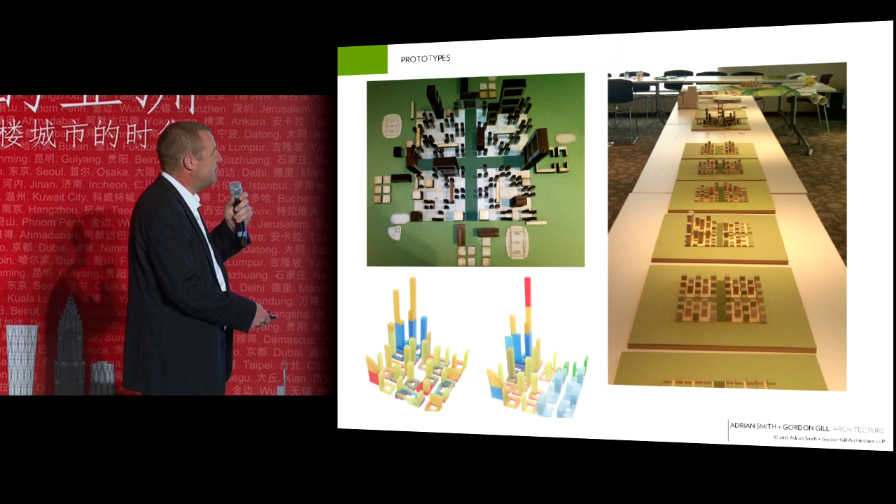This was actually a meeting in the client's office where we were walking him through the process of how you might start to develop a city around that. This shows you an example of how we like to work with the client—working with them to put ideas together, connect stuff, and so on.

During this meeting on the second day, the client actually said, well, that's very nice, but we have a site now, and I'm afraid a square thing isn't going to work. You're going to have to think of something else. And this was the site he gave us here, and this is the site in Shuangliu County.

This is a freight rail, this is a main road, and our site is this. So one of the things we wanted to do was firstly look at the topography, and what was really great is that we were able to do this in front of the client using GIS. He provided us with some survey data and a satellite image, which is all we needed. We took this, did a digital elevation model, and right away you can see we have some beautiful topography. We have a ridge running east-west—this map is oriented north-south—and a ridge running north-south. So we had natural valleys, which we thought straight away we could use for managing rainwater.

From that, we were able to develop this. We took the site and made it a little simpler to visualize by drawing along a series of contour lines. Then, through simple mathematics, we were able to develop a circular form of 1 square kilometer.

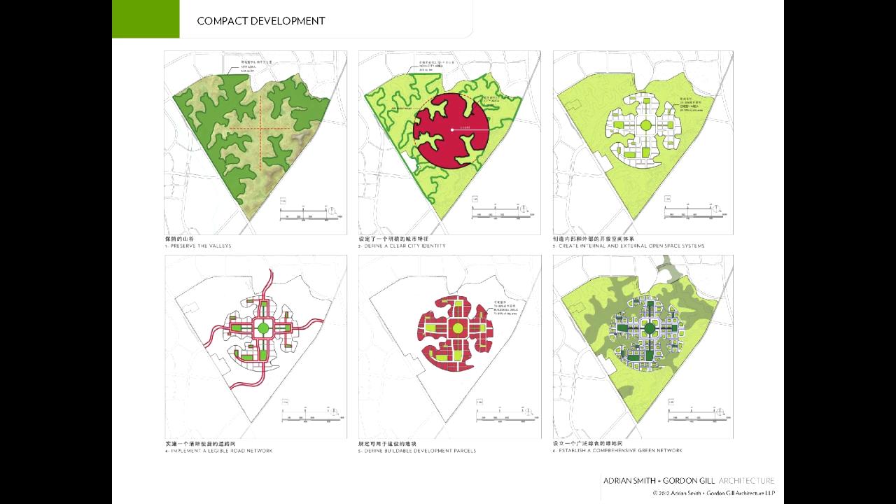We've already heard from the previous presenter how we have experience rationalizing street layouts and parcelization to make it walkable, make it accessible, and give it a clear center of focus. But all of these parcels are also things a developer would be interested in developing, since they're a manageable size. This is the road layout, and this was basically how we developed the mixed use theme.

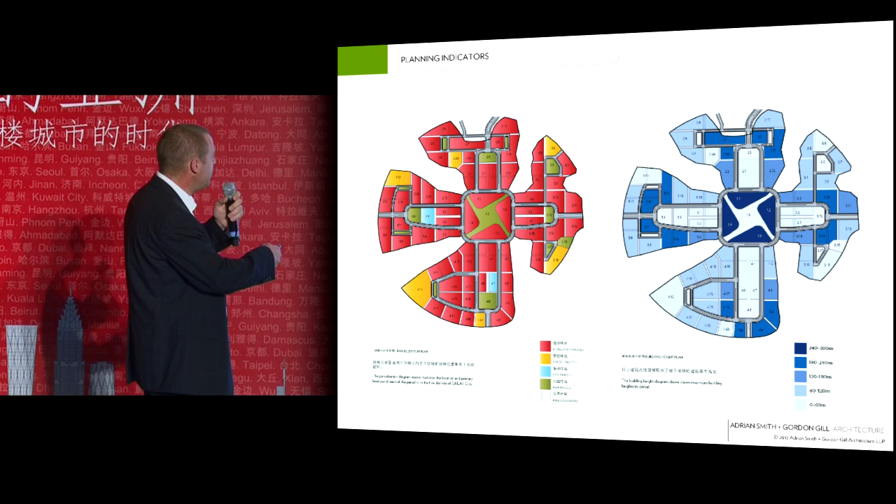We knew the city needed to have a clear center, a district center, a center of focus where you'd have taller buildings. But at the same time, we didn't want simply a central business district in the middle with residential outside—that was not what we wanted. So we had district centers in each of these four districts.

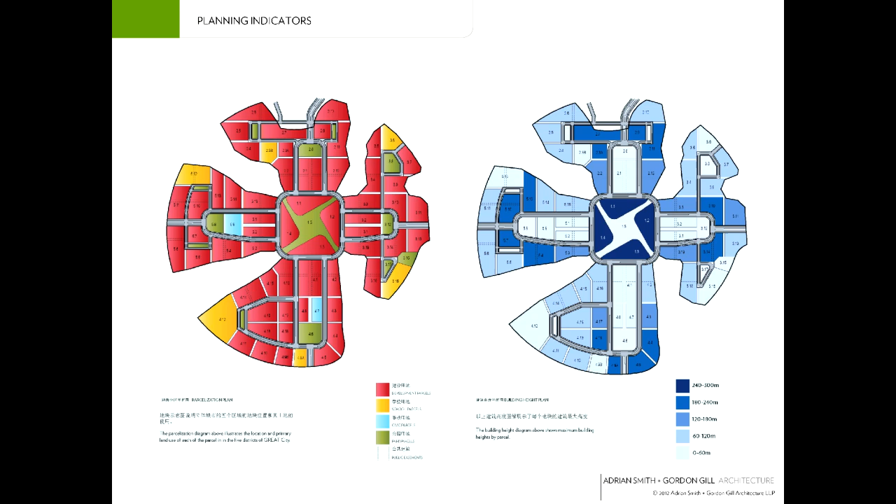This diagram shows the mixture of building heights: 240 to 300 meters in the center, these district centers around 180 to 240, then low rise around the edges and the valleys I showed you before. And this is how it ultimately looked.

We had a system where one of the key performance indicators was that people would have access to green space. Every single building had access within 200 meters of green space, which is excellent for 100,000 people.

This jelly diagram shows again how the mixed use, live-work environment worked. This is the medical district at the top here. I mentioned before about vertical farming.

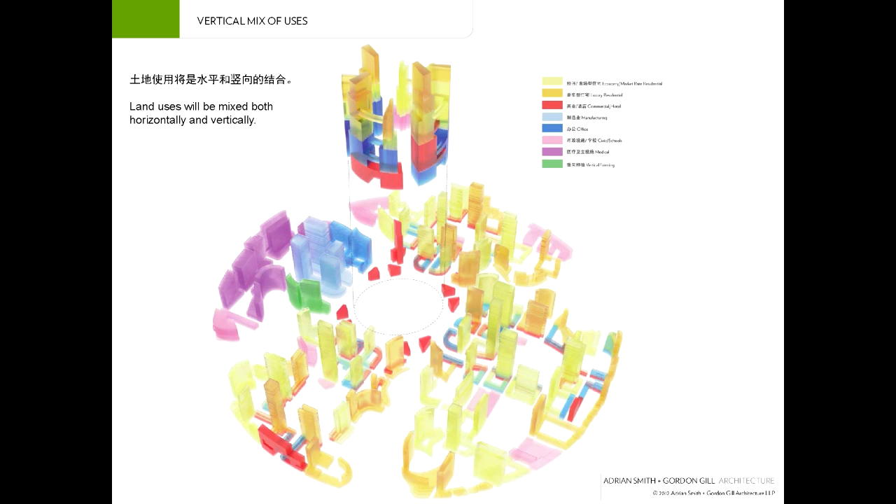We did embrace vertical farming. I think there's a lot of, for want of a better word, wackiness about vertical farming. These buildings were specifically designed for farming—they're not office buildings that you're growing plants in. They're actually very lightweight structures used for vertical farming.

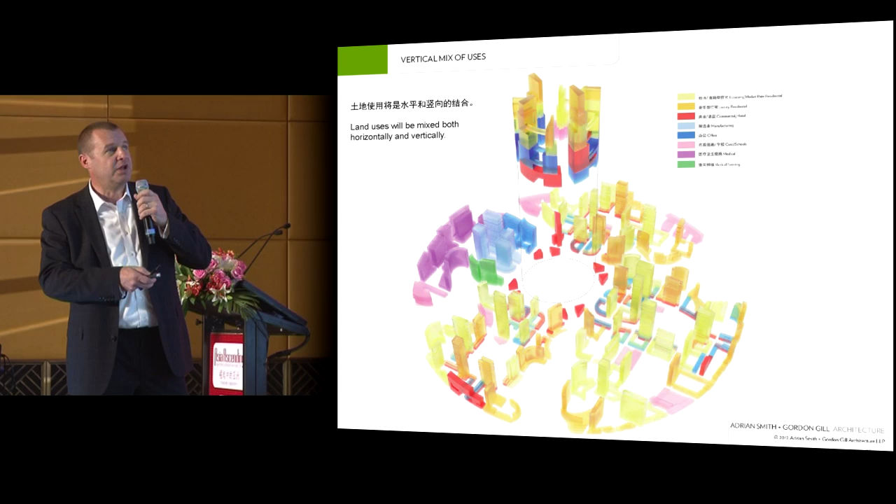We had manufacturing, schools down here, and so on. The lighter yellow color is basically affordable housing—not affordable in the European sense of the word, but housing that is affordable to people who are employed. Then in the center, the darker yellow is more high-end residential.

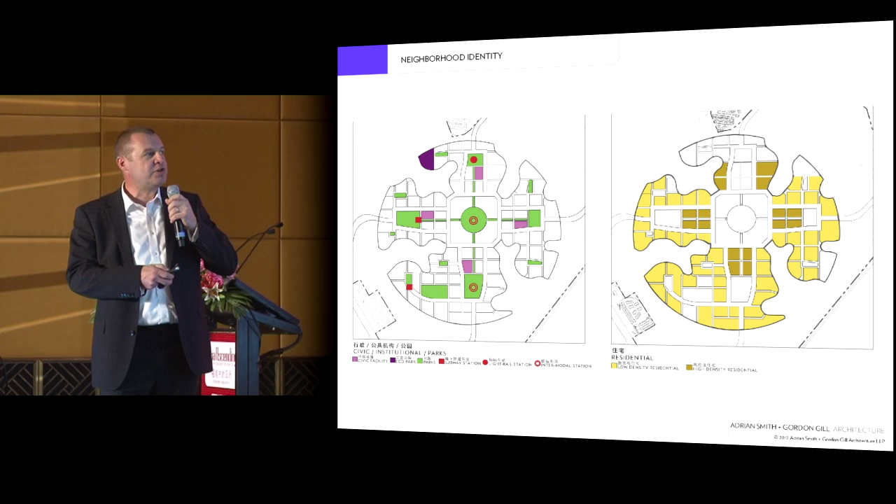Quality of life is clearly important. I mentioned the 200 meters to green space thing, but it's not just green space—we had other cultural facilities in the district centers, each with one feature that would basically draw people to it.

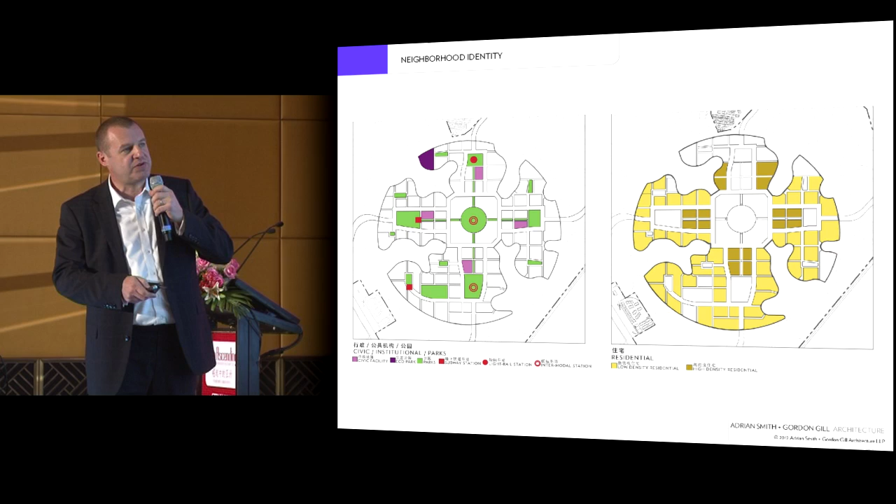And again, we talk about how we laid out residential areas—high density residential here, and lower density around the edges.

Everybody would have access to recreational areas and healthcare. And talking about healthcare, we also talk about the economies that might drive the city. Healthcare being the key one, but that in itself spawns a bunch of other potential opportunities for economic development.

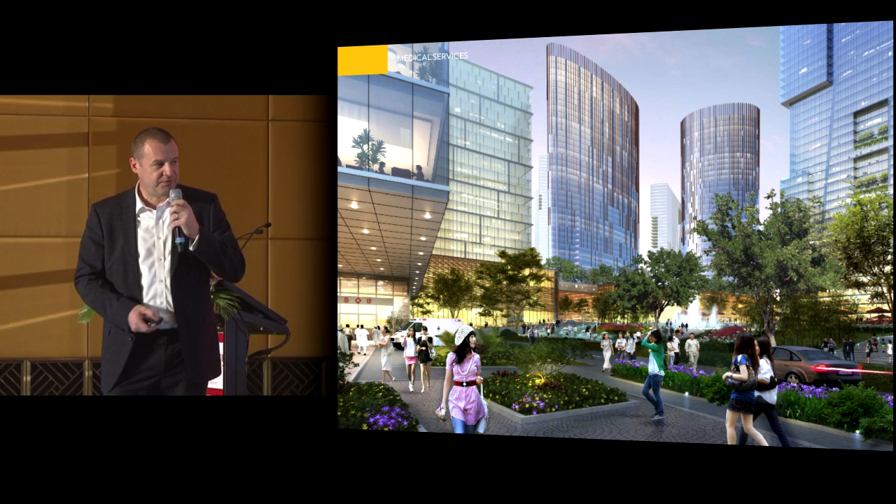The vertical farming I talked about wouldn't necessarily be lettuces—I don't think an entire city is going to be fed on lettuce—but it could well be things like medicinal crops that could support research and development around healthcare. It could be a number of high-value things.

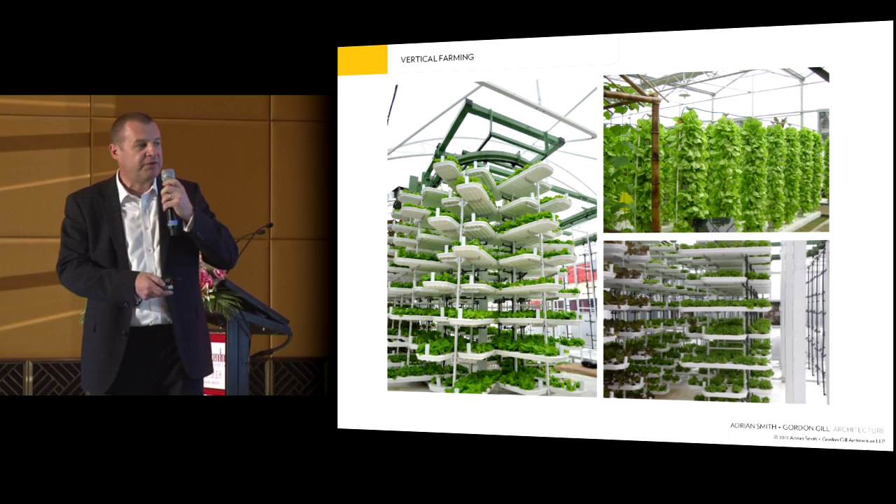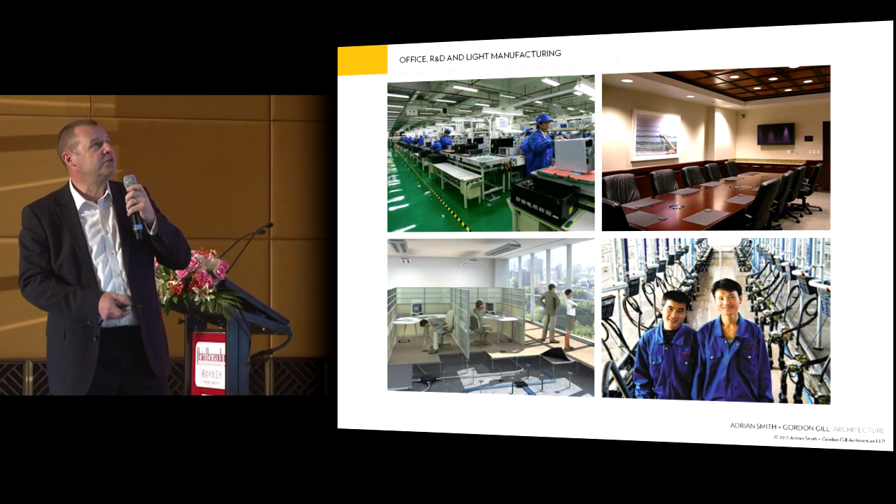Internet technology, the client is very interested in that as a money-making venture. Typical office stuff, research and development, light manufacturing - all of those things would create an estimated 51,000 jobs, of which not everybody in the city is obviously going to work in there. We'd have some toing and froing. Some people would have to come to work in the city, and some people would have to leave the city to go to work. So transportation is a big deal.

So how did we manage that? Coming into the city, we have these major roads with a potential service road underneath. We thought about how we would manage traffic, and there's a couple of things, especially for delivery vehicles, that really can slow traffic down - parking on the side of the road and what have you. So you can either build a service tunnel underneath, but what we did with the traffic consultants, Mott MacDonald, is model various scenarios where heavy goods vehicles are not allowed inside the city limits after certain times. So you just enforce the deliveries to happen at off-peak times. There's lots of solutions for taking vehicles off the road that don't necessarily penalise people.

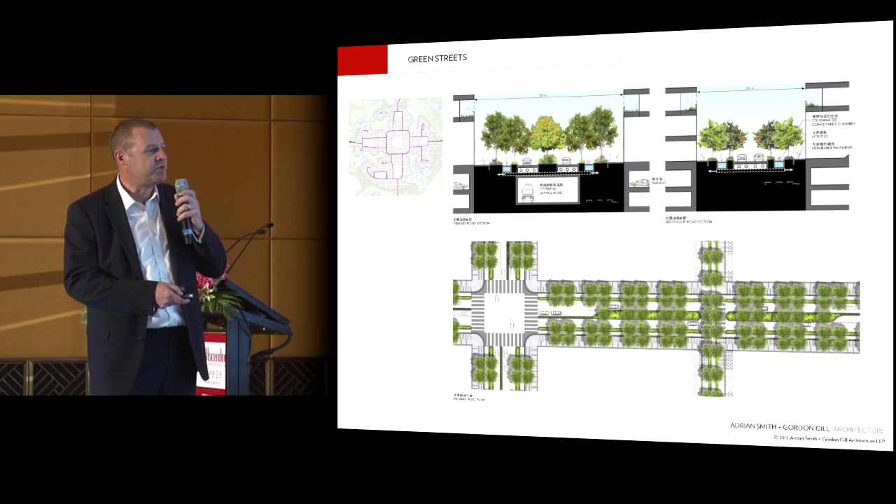We didn't want to penalise car drivers, we just wanted to encourage people to use alternative sources. One thing we thought is that people would drive into the city. I'm going to show you another image here. People could drive into the city and we'd have multimodal hubs, so you could drive in or use the metro - I should have pointed out, in fact I do point that out in another slide. People could come in and use bike rental schemes like you have in London, Paris, Chicago, all over the world. And then they could cycle, or walk, or catch a bus that just takes you around. There's so many options, you don't have to drive into the city.

And even Zipcar - we spoke with Zipcar, and interestingly enough, for those of you who know car share schemes, cities such as Chengdu exactly match their economic model for where you would want to do that kind of thing.

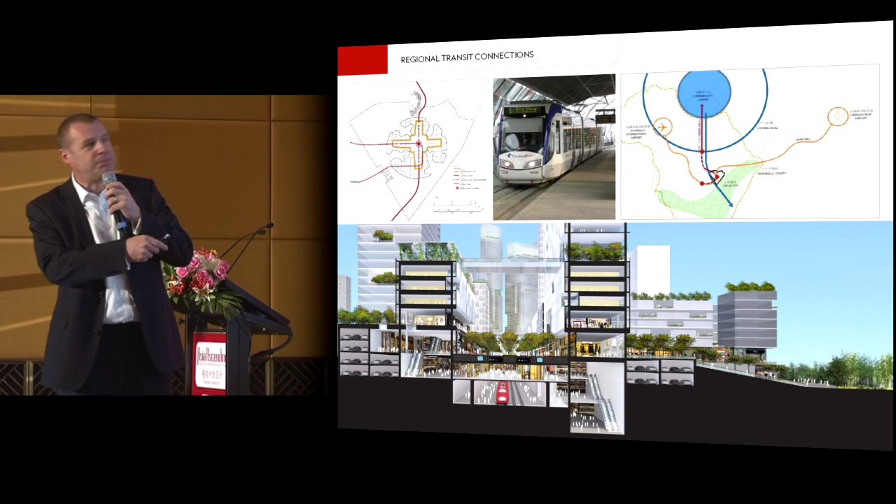The connectivity with transit, I did mention - this is Chengdu City. There's a high-speed rail that links Chengdu to other cities, and then there's a metro rail that would come actually straight through the center of our city and head south, and there's a second line potentially planned that would loop in like this. So it had great connectivity.

Sustainable infrastructure - I think this is where we get into the hardcore sustainability, and this is where we spent a lot of the focus of the city. In fact, I should really highlight some of these things. When you're developing a city, we overuse the word integration, but one time you really should use it is in urban planning. You can't develop buildings without considering the bilateral relationship with the infrastructure that supports them.

The cost of infrastructure is very high, so an efficient building uses less infrastructure. Better infrastructure can reduce your energy demand through load sharing, interseasonal heat storage - there's so many things that we can look at.

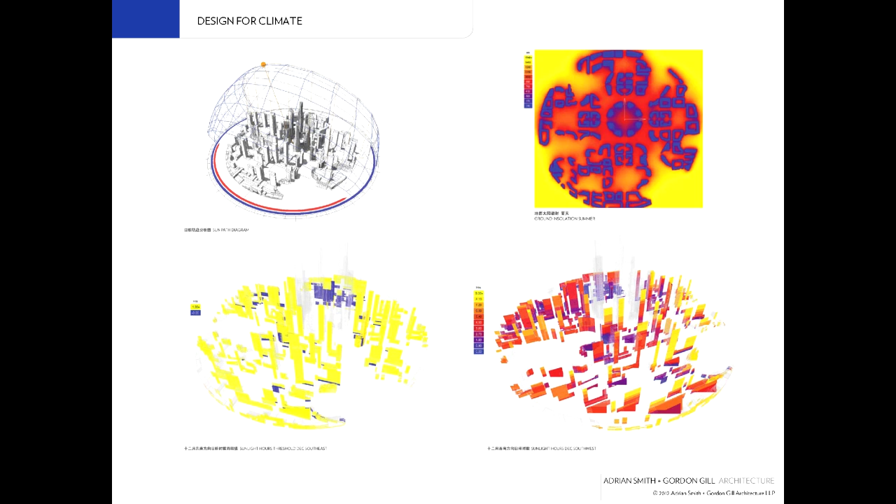When we designed the city, we did a lot of environmental modeling, and we actually had to develop tools that allowed us to model at an entire city scale. Clearly, there's a lot of potential for overshadowing. So what our parametric modeling allowed us to do is, when one building clearly was going to have an effect on its neighbor, it kind of generated itself - the building would then move or rotate to reduce that. And so we were able to totally optimize daylighting, which is obviously an important thing in any city, and it's a code requirement, of course.

We had a lot of strategies to reduce energy demand. I don't need to go through all of them, but ultimately through just smart passive design and using high-performing materials - and when I say high-performing materials, I'm not talking about new emerging technologies, I'm just talking about integrating existing technologies that are out there to deliver a 30% energy saving.

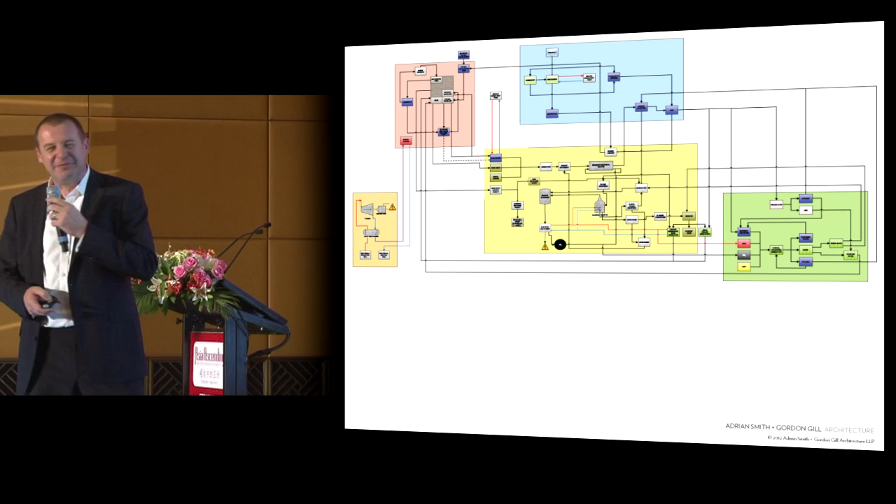This kind of web, which I'm going to skip away from, basically showed how we integrated things, and it's absolutely critical. If I can just walk through an example.

So you would have the buildings producing wastewater. That wastewater would be treated in what we developed as an eco park, located on the north of the city. That eco park contained a solid waste management facility, a combined heat and power plant, and wastewater treatment, which allowed synergies to develop and maximized the opportunities for saving energy and cost.

Back to the wastewater example: a building produces wastewater, that goes to the eco park where there's a wastewater treatment plant. We'd have an anaerobic digester to produce biogas. The biogas would go into the combined heat and power plant. The CO2 from that we could just discharge into the air, but alternatively we could enrich the atmosphere in the vertical farming, because they're custom built so you can do that kind of technology.

The tertiary treatment of the water could happen in these valleys, providing recreation and fish farms. I'm sure you've heard of reed bed filtration systems commonly used in the rest of the world. We can use a similar system but using bamboo here. Bamboo produces biomass, which goes into the waste to energy plant, generating heat and power.

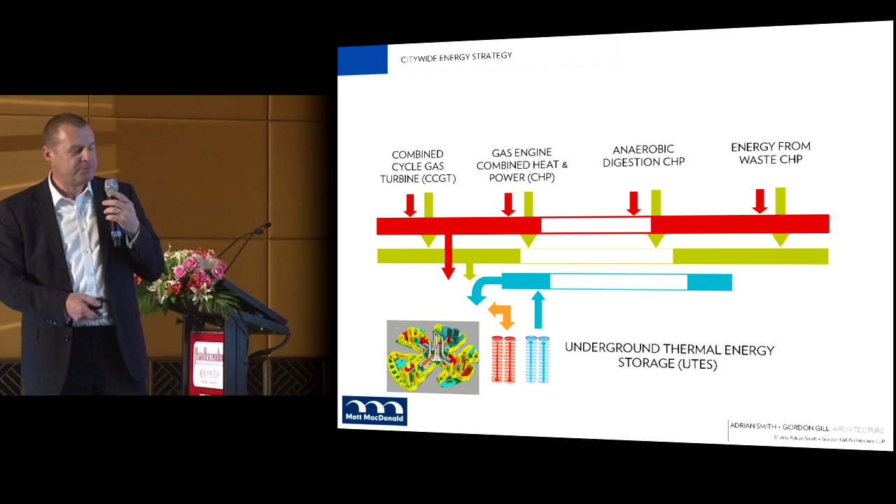So it's very easy to see how you can link all of these kinds of things, especially when you have the advantage of developing something absolutely afresh.

Mott MacDonald had a great system used in Europe called underground thermal energy storage, or interseasonal heat storage, where basically you cool the ground. You have two parts of the ground: some parts you try to cool so you can use that in summer, and in summer you reject heat into a second part and use that heat in winter. It's simply like a large geothermal heat rejection system, but it's very effective and has no impact on the environment.

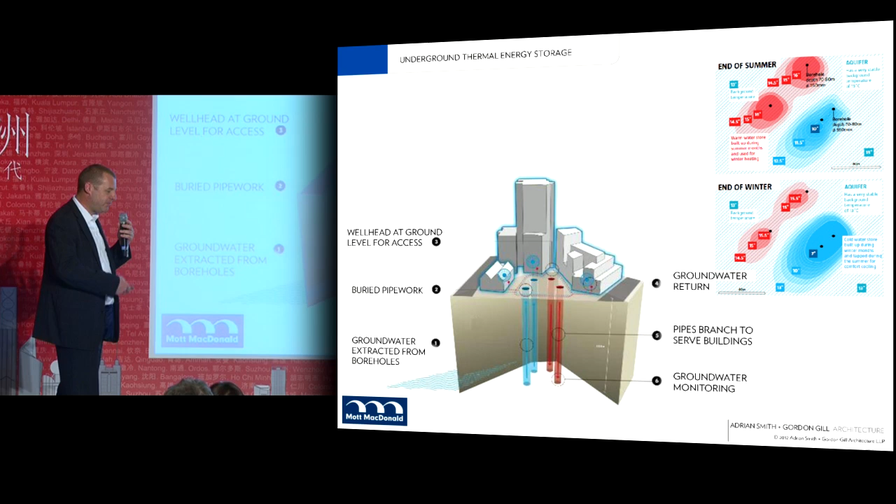And of course, what it does is really reduce the need for peak energy production, which is usually the dirtiest power. Well, I've talked about the eco park already.

So we had a vacuum waste collection system. I think that's very common in new cities. It's so efficient, takes garbage trucks off the road, and encourages source segregation.

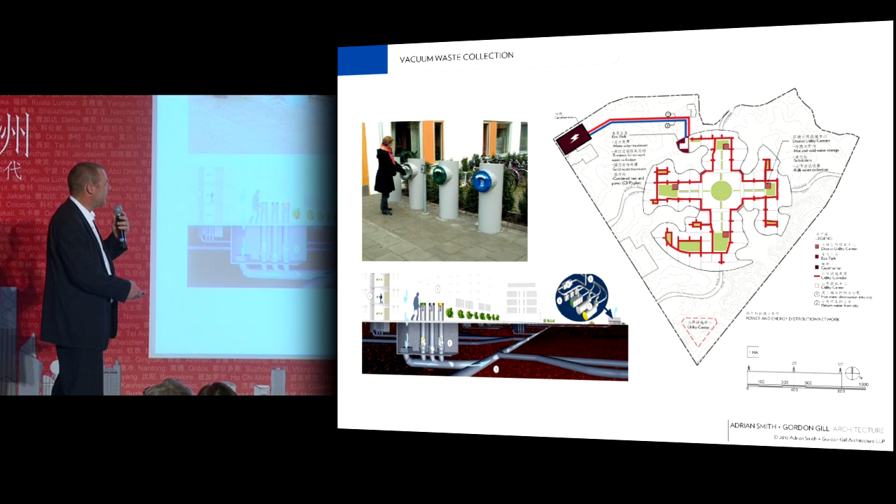Is that it, that bell? All right, we've got 5 minutes or something. The natural systems.

Yes, very important. Like I said, we wanted to retain the agriculture, so we kept as much agriculture here as possible. It ended up being a little bit more programmed, but was supported by more groundwater in the valleys, having a greater volume of water because it's come from the city.

We have productive areas, and we have functional landscape where it would be more creative for people to have recreation. And of course, all these things are serving multiple purposes. I think that's the key when you're developing something like this: every single thing that you do should have more than one function.

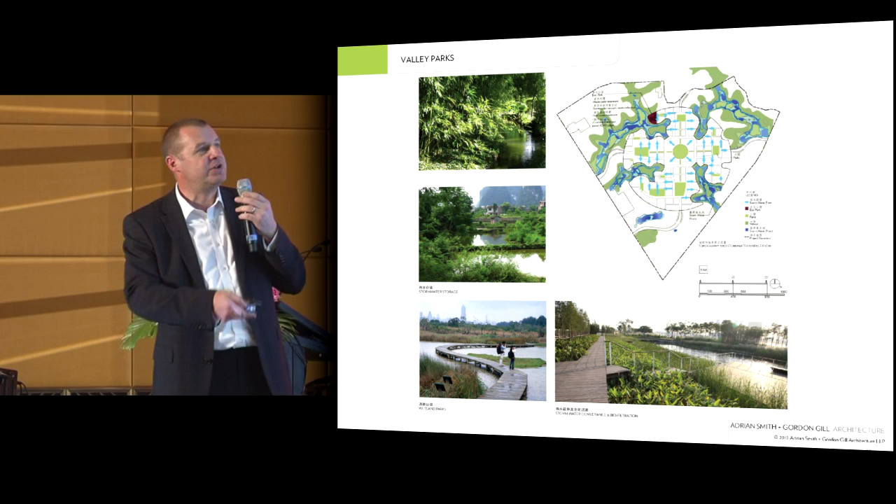I think that's really important, and that was definitely the case here. Like I said, the stormwater management areas would also serve as a tertiary treatment for wastewater. They'd produce biomass, there'd be recreation areas, you could farm fish — so many things you can do.

This Linpang concept is basically one of the things we wanted to do to enhance the look and feel of the city, where we actually bring the natural landscape into the city and up the buildings. You see that a lot. I'm not sure how successful it is in very tall towers, but on lower buildings like this, it really improves the environment and the microclimate.

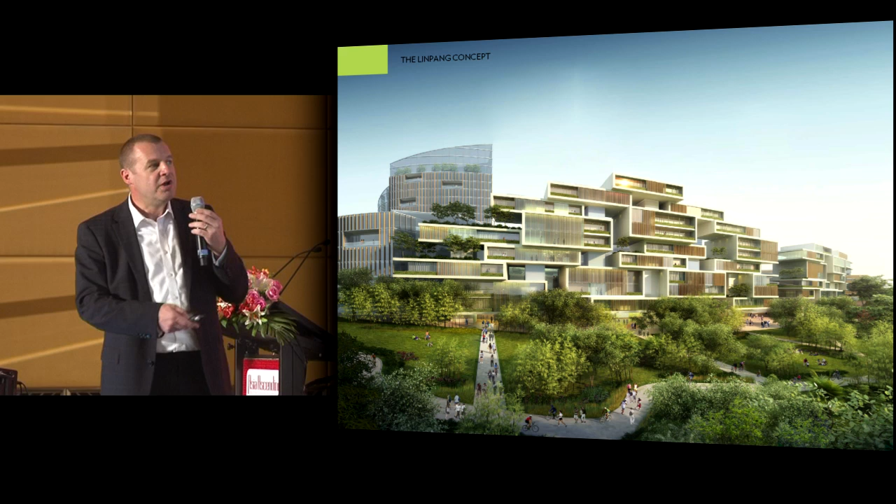People, when they're connected with the landscape, are better. There are so many studies showing that patients in hospitals have a faster recovery rate when they can see landscape out of the window. People, even in offices, are more productive when they can see green out of their windows. So it's a tried and tested concept.

It's not a gimmick — just bringing green into the building doesn't cost anything, and it really improves the environment. This shows how we envisage possibly one of the city ends of the valleys looking. You want this water edge to engage with the public and the water.

Agriculture, yeah, we talked about that. The client had some very specific requirements for how he thought that the agriculture should be done, and he wanted certain areas for certain types of crops, so we worked with a local landscape architect who was really awesome, and we developed that.

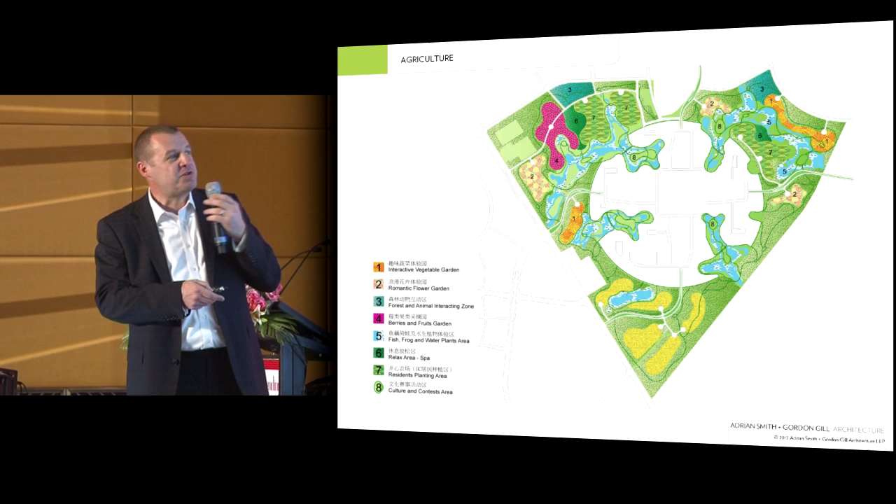It kind of looks a little bit strange here, but it was a really nice system, and they developed a series of cycle paths and jogging paths that people could use. One important thing is that people do like to have gardens. People who live in super tall buildings - one of the big complaints is that they don't have access to their own garden.

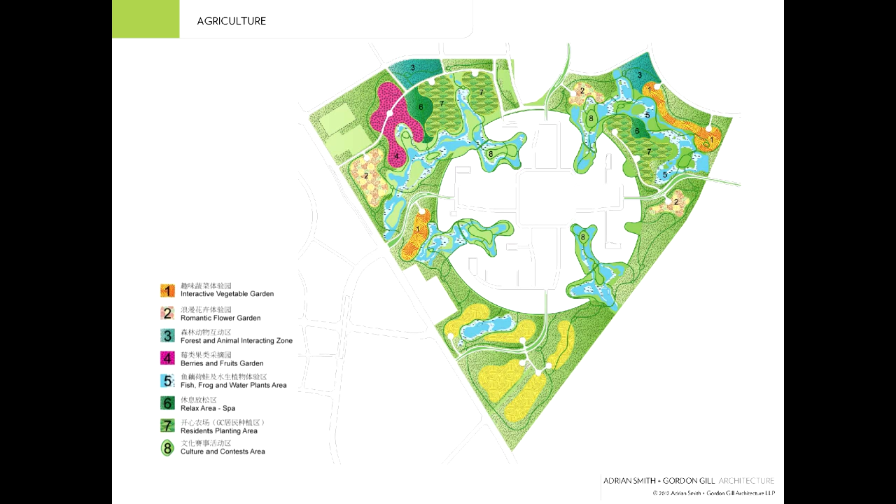So the client worked with us to develop a system where people would have allotments - I think they call it city farms - where people would actually rent a little plot of land, and in the evening or at the weekend they could come and grow crops and then just literally walk back to their building. Absolutely beautiful.

Innovative architecture - obviously what we wanted to do was to create a new typology for buildings. It wasn't just a case of taking existing buildings out there and putting them in. They would have to be different to meet the demands for speed of construction, feasibility, and what have you. So we looked at very modular systems, and the phrase 'a kit of parts' - again, it's a very overused phrase, but this would be a time where that's an appropriate phrase.

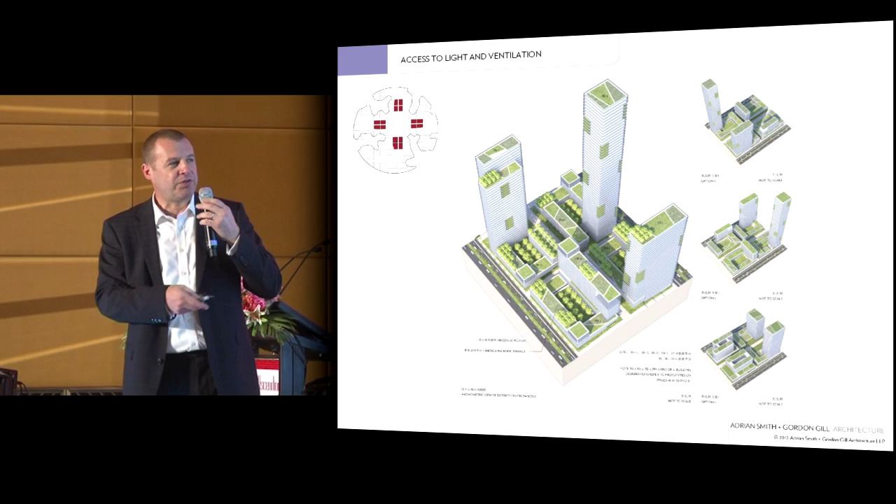We have lots of, at least in the master plan, building typologies - there were only a certain number of types, and there has to be, otherwise you end up having one building that actually has an impact. When you have a dense city, you would have buildings that have an impact on each other, and we went to great lengths to try to reduce that through the modeling exercise.

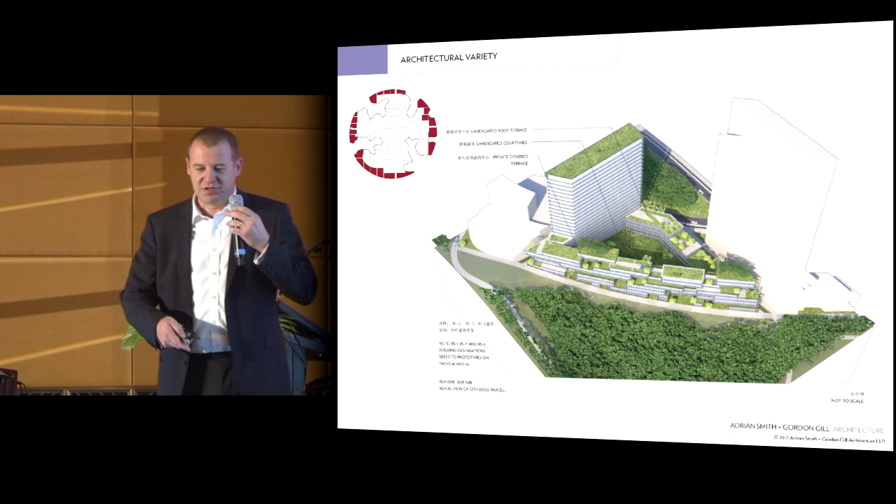So this shows you a city edge - this is the very edge of the city. We did want to give it a clear boundary. It didn't want to be a walled city, but at the same time we didn't want to create what we're trying to solve - we didn't want to encourage urban sprawl in our own city. This land is very precious to us, so we felt that having a defined edge was very important, and it's very clear, a very strong edge around the city.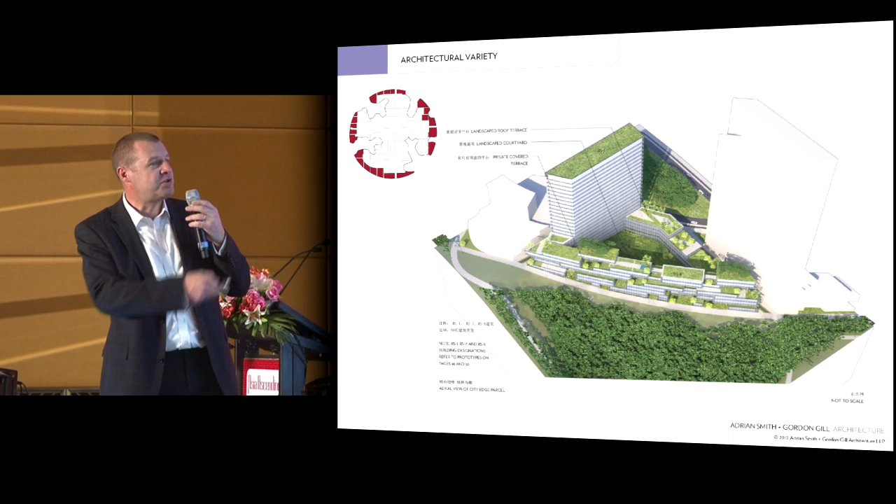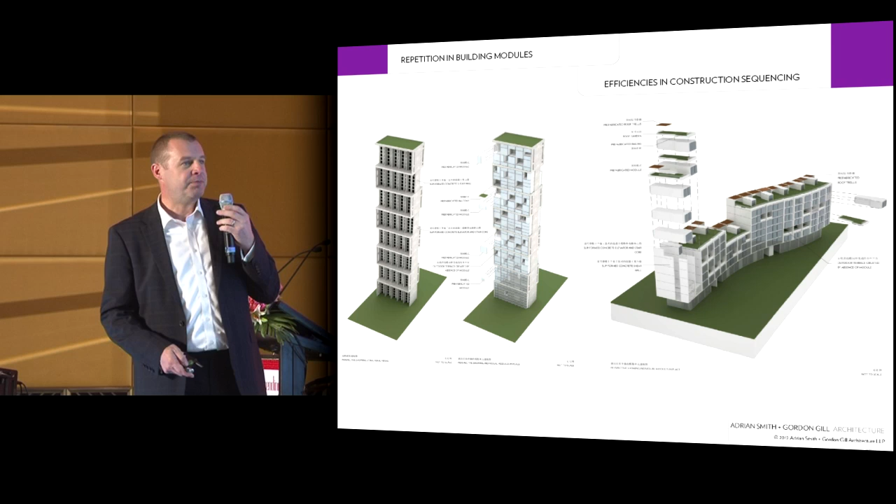And now I'm going to just quickly finish on talking about our strategy for how the city could be built. I'm sure everybody in this room has seen the Broad video where they assembled a 30-story building in 15 days. Some of you might be going to the hotel at the weekend. We didn't work with Broad on this, but clearly this is a system that people are considering.

So buildings that are very modular and easy to adapt as needs change. Perhaps this might want - not halfway through construction, but these could be offices, and the modules could be not changed once they're in place, but you could imagine that you could just put an office module in instead of a residential module.

And the other thing about this kind of stuff is when people are moving out of the countryside, they don't have skills, and you can see how this would actually create a new skill set for the people in that area. They could work in an industry of building, prefabricating, and be literally moving from the countryside to being at the cutting edge of construction technology. It's incredible.